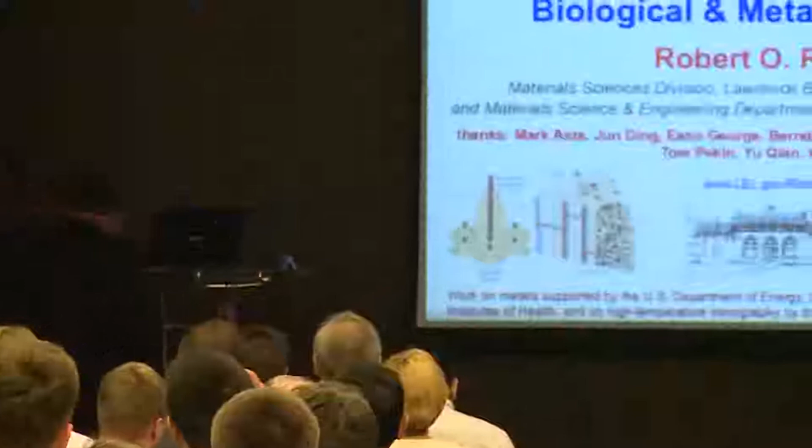Well, thank you, Leslie, and thank you, Professor Sagnet, for inviting me here. It's an awful long way from California, but it's been worth it.

I'd like to talk this morning about my favorite topic, which is damage tolerance, and I'd like to look at a number of different classes of materials where we've tried to enhance damage tolerance, which is basically fracture resistance coupled with some degree of strength. So I want to look at some biological materials. I'm not going to talk too much about this because there's not much biological work in this conference, but I would like to mention a few materials first, and then I'm going to talk about some metallic materials and some of the more modern metallic materials, to coin a phrase, these multi-element metals.

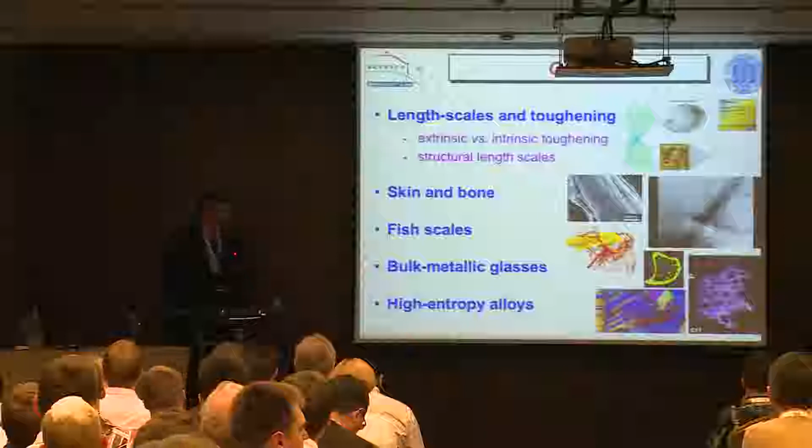So this is my outline. I want to say a few comments first of all about toughening and what I understand by fracture resistance in materials, and then take you through something which is probably quite close to you, which is your skin and your bone. I'll have a little short detour via fish scales, and then I'd like to talk about these new, not so new perhaps anymore, multi-component alloys, mainly bulk metallic glasses and high entropy alloys.

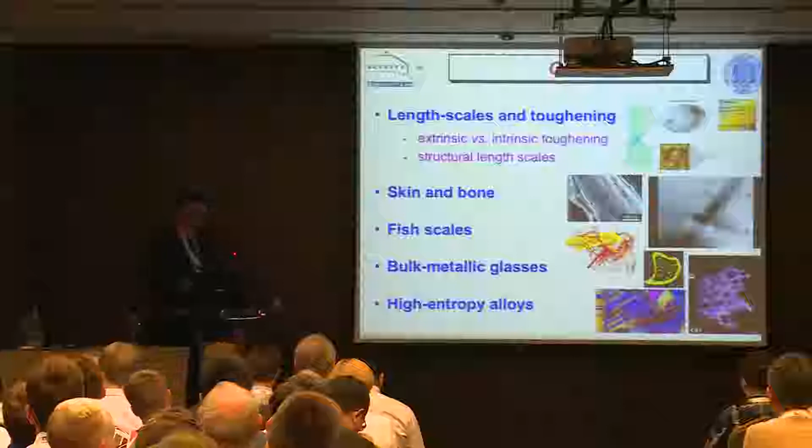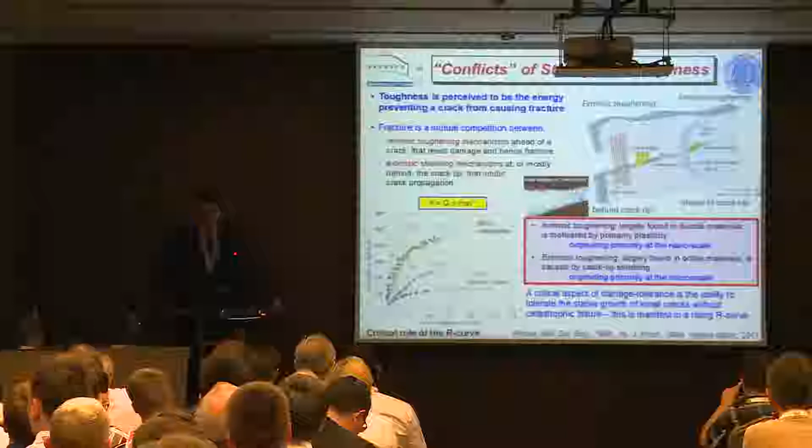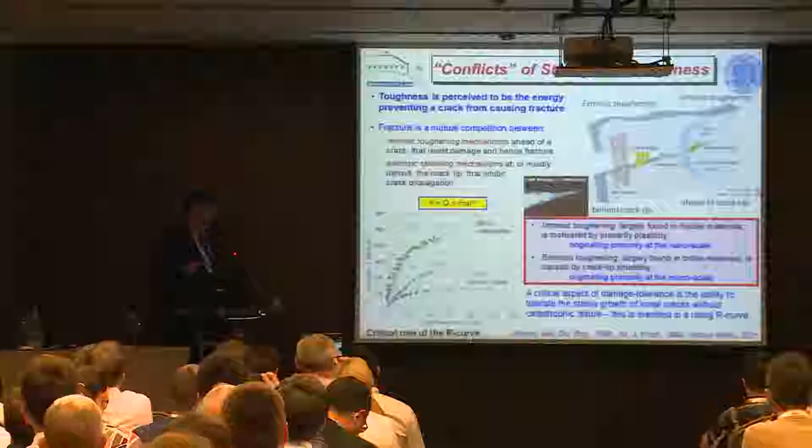So first of all, what is damage tolerance, and what do we understand by this? It's, as I said, a combination of fracture resistance, toughness, and strength, which is generally a compromise or a conflict, as I've called it. There's a conflict between strength and toughness. Most strong materials don't necessarily excel in toughness, and vice versa. And there's a number of conflicts in this whole aspect of fracture.

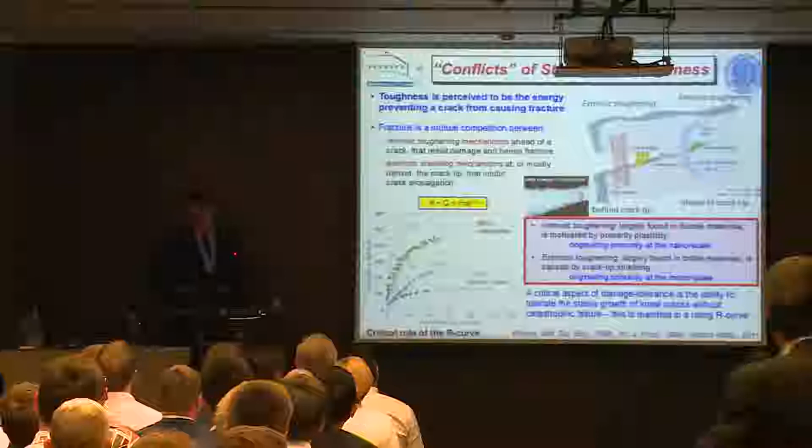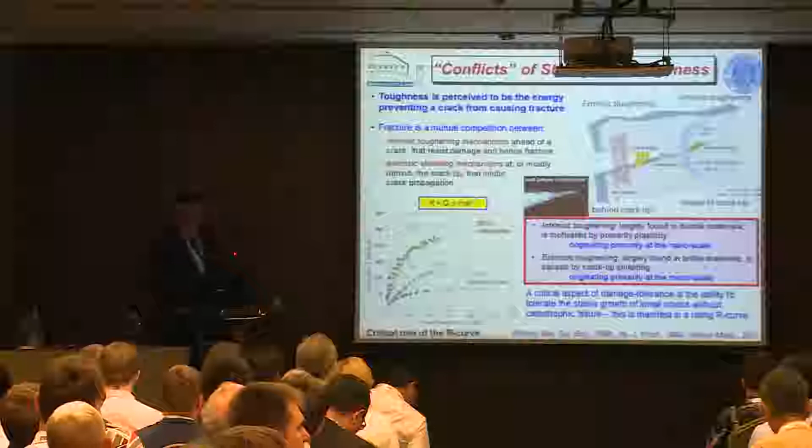I like to think of fracture as a mutual competition between classes of mechanisms. There's what I call intrinsic mechanisms ahead of the crack tip, toughening mechanisms, and these are mechanisms that basically inhibit damage, whatever that may be - void growth, particle fracture, and so forth. The prime factor here is basically plasticity. There are other things, but that's the prime thing. These mechanisms take place ahead of the crack tip, and they really are how metals or ductile materials are toughened. But those mechanisms simply don't work when you get into a brittle material like a ceramic.

And then there's another class of mechanisms that operate behind the crack tip or at the crack tip. I call these extrinsic mechanisms, and these are not associated with plasticity necessarily. They're associated with shielding, and they effectively lower the local stress or strain field at the crack tip compared to what you think you have. There's a number of mechanisms - bridging is one, of course, as we see in fiber composites and lots of different materials. Crack closure, which is a wedging mechanism, is seen in fatigue, and deflection.

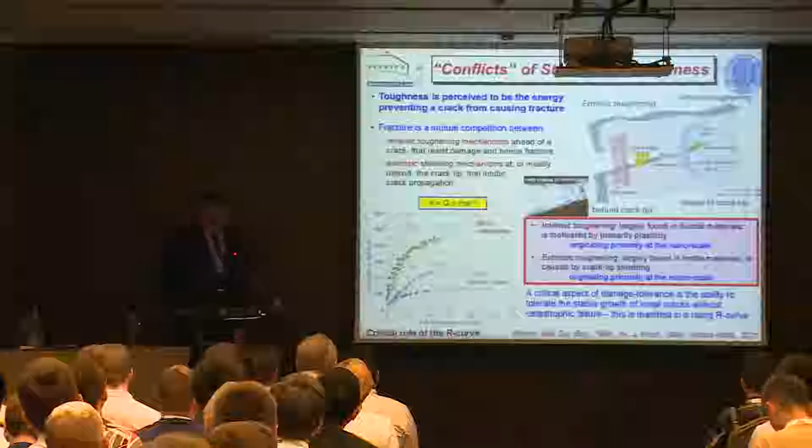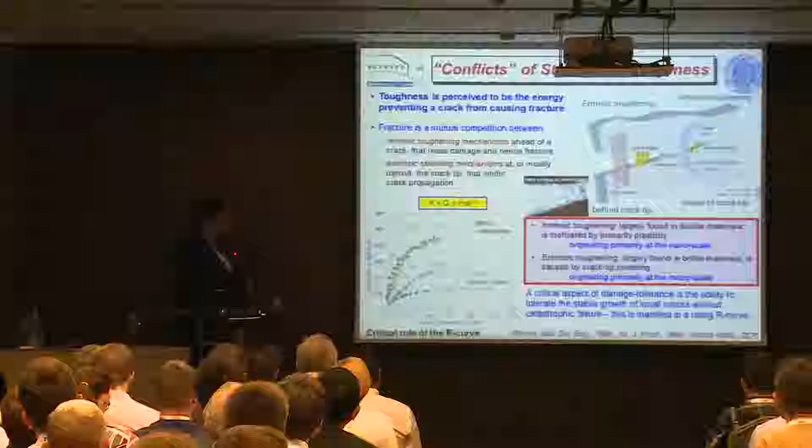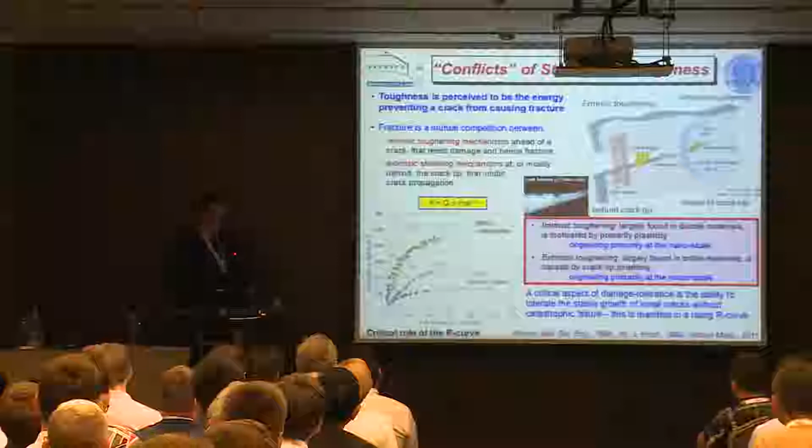Now there's an interesting contrast here. These plasticity or intrinsic mechanisms originate typically around the nanoscale, but these other mechanisms can operate at any scale. In fact, in bone, we'll see that these mechanisms operate on the scale of hundreds of microns. These are a property of the material, and these depend on the geometry of the crack and so forth. These mechanisms have simply no meaning for initiation - you have to have a crack to have an extrinsic toughening mechanism, so these only operate for crack growth.

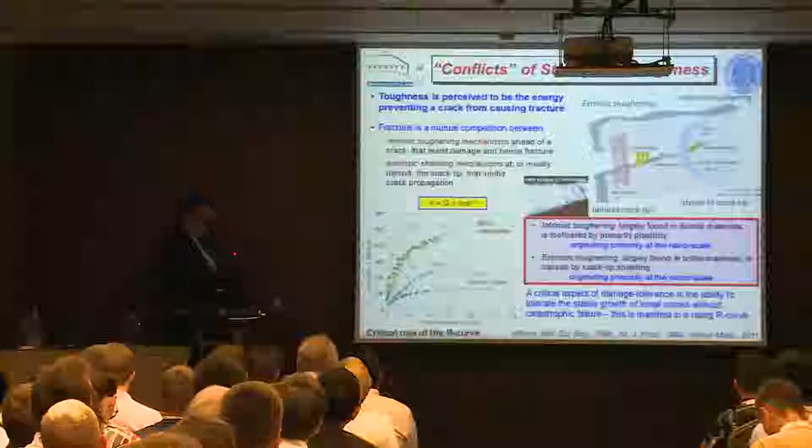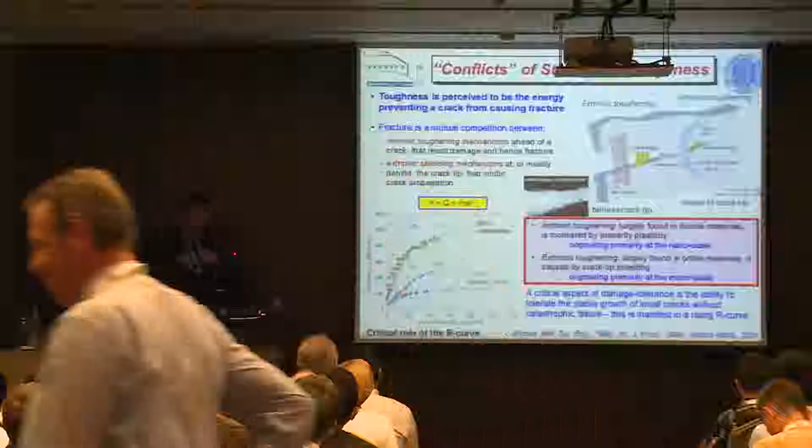And what's interesting about this is that these mechanisms generate the so-called R curve. We've heard about that the last few days. This is sort of a toughness parameter as a function of crack growth. And the R curve is absolutely fundamental, in my opinion, from the perspective of damage tolerance. You don't want things to simply break catastrophically. You want them to be able to tolerate damage, and damage means slow crack growth in many cases. So the generation of an R curve is extremely important.

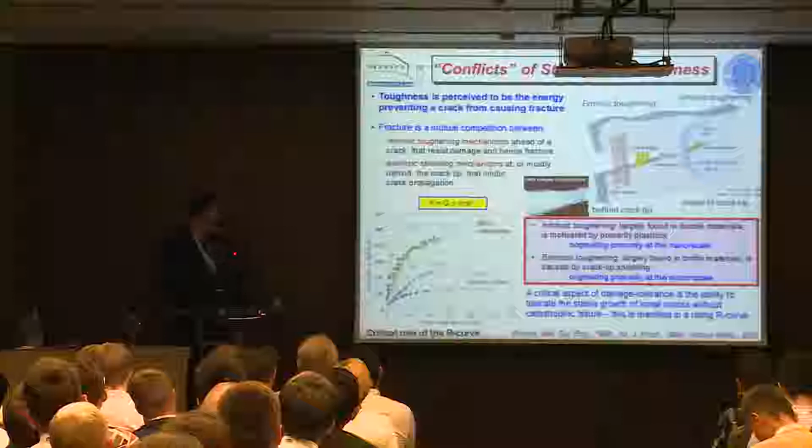Now, as I said, there's a conflict in many materials. Toughness and ductility don't always go with strength. These are mechanisms that predominate in brittle materials like ceramics, these in metals. Yet biological materials do a very good job, a much better job than we do in balancing these properties, and in many of those materials you'll see both these classes of mechanisms operating at the same time.

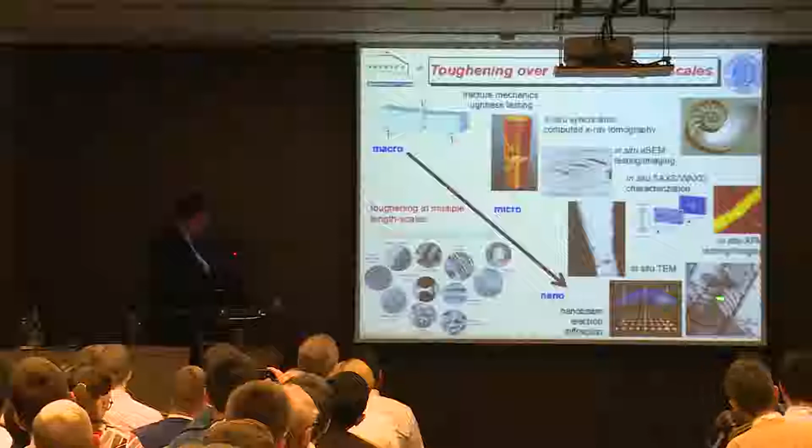So, biological materials first. These are characterized by multiple length scales. You've all heard of hierarchical structures, and there is structure from the atomistic all the way up to the macro scale. We use a number of techniques: at the macro scale, fracture mechanics and a lot of in situ testing in the SEM, plus in situ tomography at the micron scale. We'll talk a little about small angle X-ray scattering, which is a bit lower than that, and at the nanoscale we now do quite a lot of work in various TEM and STEM techniques to try and look at mechanisms. So that's our scale of techniques over these length scales.

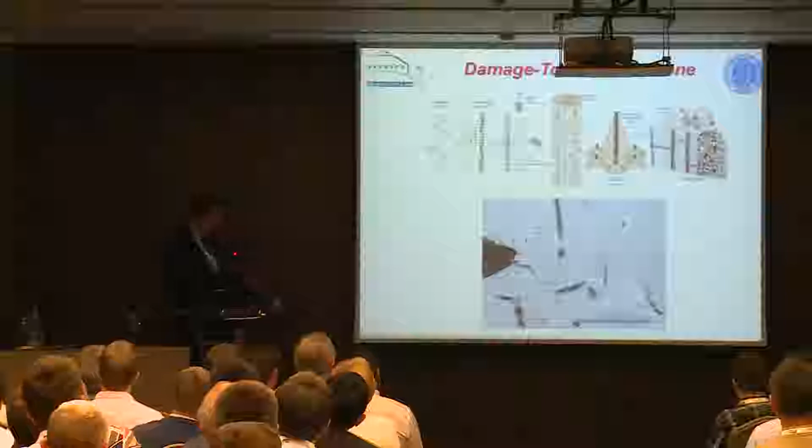So to start with, let's talk about bone. Bone is a pretty complicated but remarkable material, and it has a lot of length scales. A simpler way of looking at this is what Danny Wagner and Weiner did a few years ago, the so-called 7 hierarchies of bone. Down here we're talking about collagen molecules twisted together to form collagen fibrils. This takes us into the submicron, down to the nanometer stage.

These fibrils have minerals deposited on them, apatite, at fairly regular intervals, about 67 nanometers apart. The fibrils are then twisted into fibers, and we're now up into what's sometimes called the lamellar bone regime, in the tens of microns. Then we go up into the hundreds of microns, where we have so-called osteons, which contain the Haversian canals. These are concentric structures; the interior carries the blood vessels, and the bone remodels that way. This has characteristic length scales of hundreds of microns.

And then at the top we have the bone itself, with the compact or cortical bone on the outside, and the trabecular or spongy bone on the inside. So it's a whole range of length scales.

Now how is bone toughened? Bone's a pretty resilient material, and this extrinsic-intrinsic notion works reasonably well. If you look at mechanisms below about a micron, ahead of the crack tip, it's plasticity. Plasticity in bone involves a variety of mechanisms, but the principal one is that collagen stretches and then tends to slide apart - something called fibrillar sliding, which is just the sliding of collagen molecules next to each other. That's a plasticity mechanism, but if anything locks that up, that's how you lose ductility in bone. So the toughening mechanisms at these scales are plasticity, predominantly this fibrillar sliding.

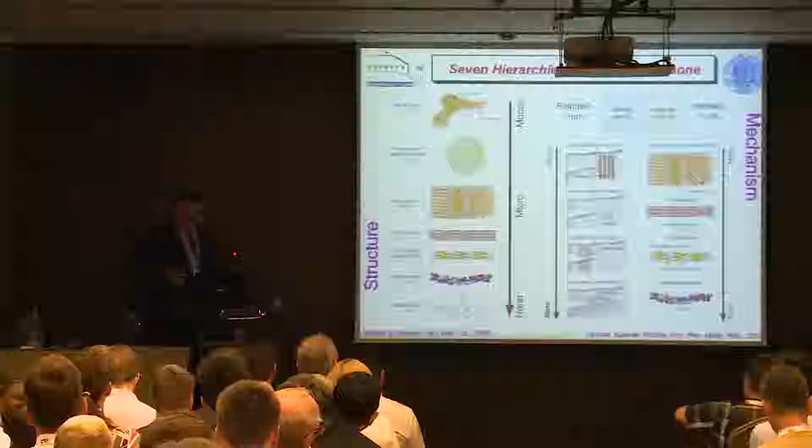But if you move up in scale to above a micron, and look behind the crack tip, you see mechanisms you'd see quite readily in a ceramic. There's a lot of microcracking in bone. It's very important - it leads to remodeling of bone. It's also an inelastic mechanism, a sort of pseudoplasticity. Cracks grow into this sea of microcracks, and little regions in between those microcracks become bridges, leading to very strong deflection. These columns here are the so-called osteons, which run along the axis of the bone.

These are Haversian canals inside. The boundaries of these osteons, where bone remodels, tend to have a higher mineral content, and cracks will tend to deflect along those boundaries.

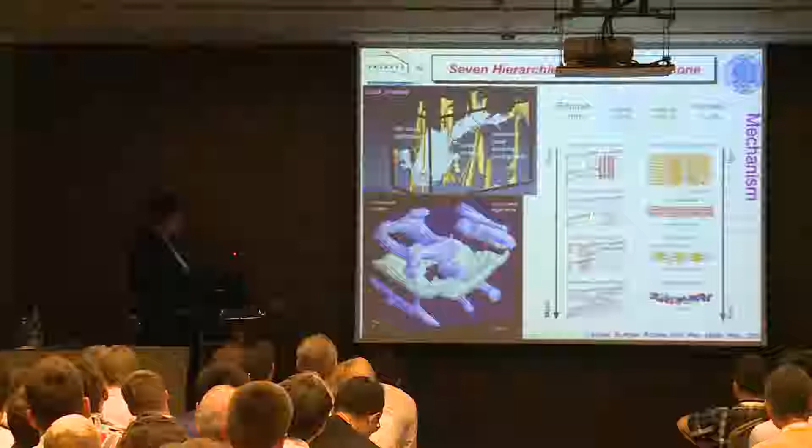So if we look at a typical example, this is tomography - I can show some examples of these mechanisms. This is a three-dimensional tomography of bone. This light blue is, of course, the Haversian canals. This white area is the crack, and this is the front of the crack here. These dark blue areas behind the crack tip are regions of uncracked ligament bridges.

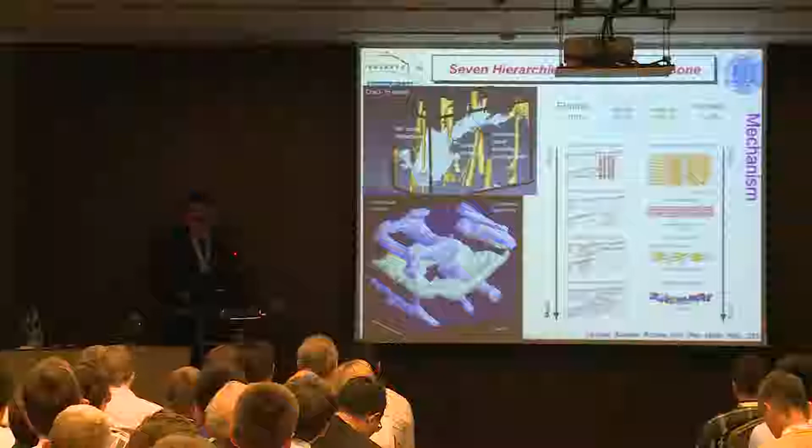And the deflection is very clearly shown here - these yellow columns are the osteons. This piece of bone is being pulled vertically, so the crack should propagate perpendicular to the maximum tensile stress. But you can see in the white area that the crack deflects dramatically as it encounters these osteons, and the deflection is actually more than in-plane.

You get twist as well. So there's a lot of toughening associated with these extrinsic mechanisms, in addition to the classical plasticity mechanisms at the smaller scales. Now, how does this affect bone's properties?

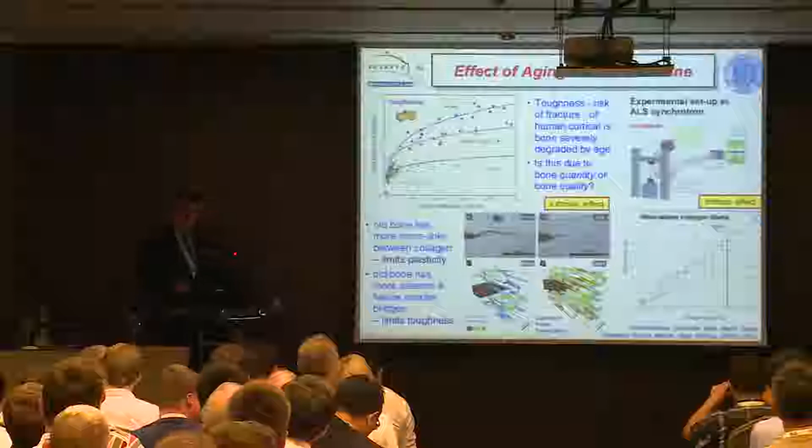Now, I've got many examples. This is an old one, you may have seen this before, but it's an easy one to look at. I've looked at various diseases. We don't always understand the biological source of those diseases, but we can see why it affects bone. This is one that's close to my heart.

When you start to age, you have a higher propensity of fracture of bone. A lot of that's thought to be due to loss of bone mass, which is a bone quantity issue, and it of course is, but there's also a bone quality issue as well, which is the fact that the bone deteriorates in its toughness. These are R curves.

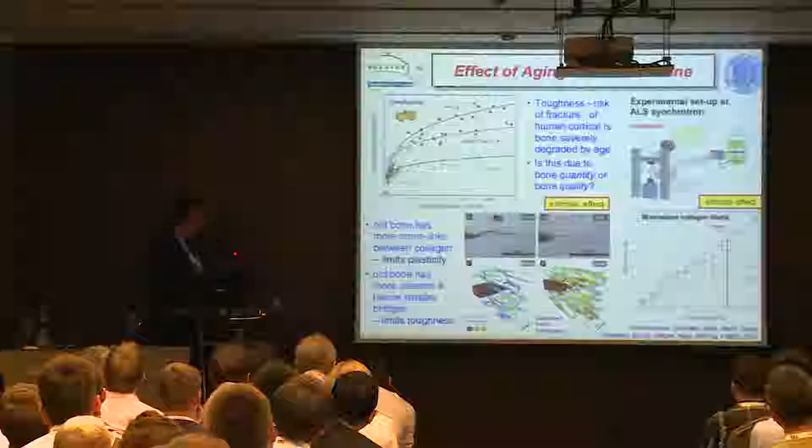This is young bone, a 30-year-old, a 50-year-old, and 80 to 90-year-old bone. As you get older, you don't see this very clearly, but there's a deterioration in the initiation toughness of bone here, and there's a much greater deterioration in the crack growth toughness. So why is that? Well, just quickly, you can again subdivide this into intrinsic and extrinsic mechanisms.

Extrinsically, you see these little uncracked ligaments, these little uncracked regions that act as bridges. Their spacing is typically the spacing between the osteons, because that's where the microcracks will form in those mineralized boundaries.

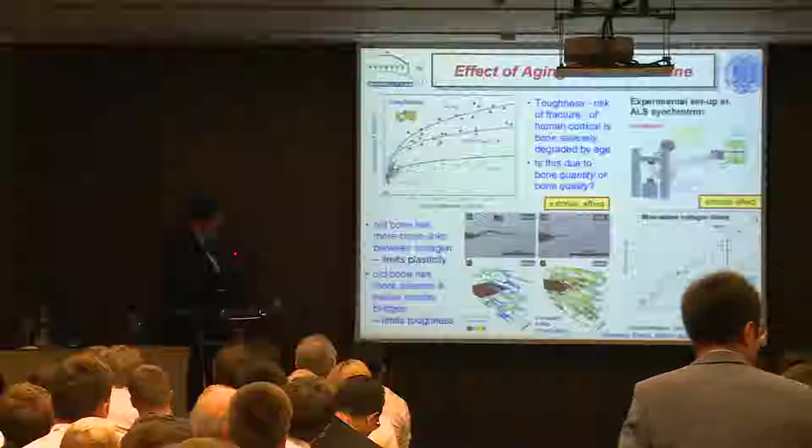If you look at a piece of young bone versus a piece of old bone using tomography, these blue and green columns are the osteons, and you can see there's a dramatic increase in the density of osteons as you get older, particularly with excessive remodeling. Since these little bridges are a function of the spacing of the osteons, this bridging effect becomes much less effective as you age, so there's a deterioration in the crack growth toughness.

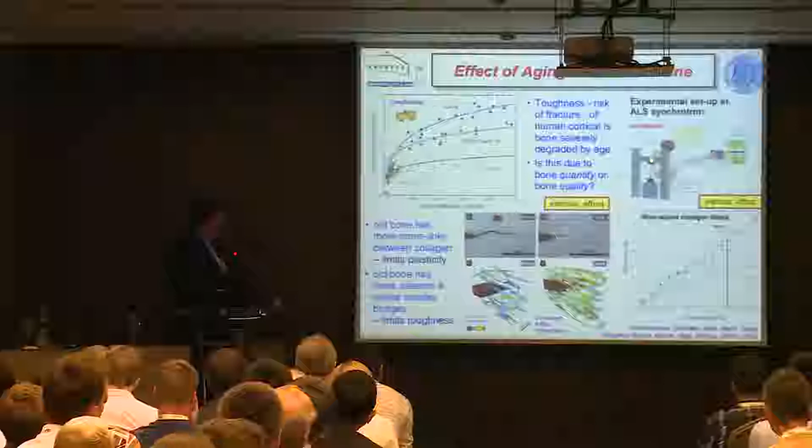The intrinsic part is interesting too. We can look at this using the synchrotron. We do a tensile test on a piece of bone and measure the strain in the bone. Then we do wide-angle X-ray diffraction, focused on the mineral, to get the strain in the mineral—that's not too important here.

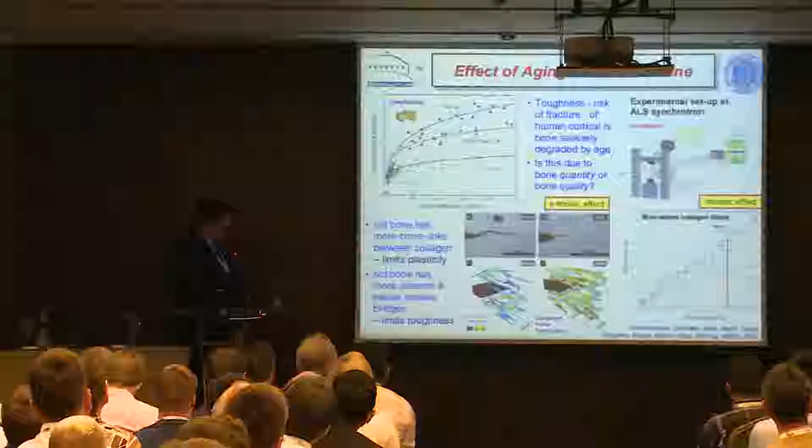We can also do small-angle X-ray scattering and look at the collagen. Since the mineral is very uniformly placed along the collagen, we can get a strain there as well—we can measure the strain in the collagen. What you find is if you look at the strain in the collagen versus the strain in the bone itself...

For young bone, at about 1% strain, virtually all the strain is carried by the collagen, of course, because that's the flexible part of bone. But for old bone, it's a very different story—for a 1% strain in the bone, only half that strain is carried by the collagen. So the collagen is less effective.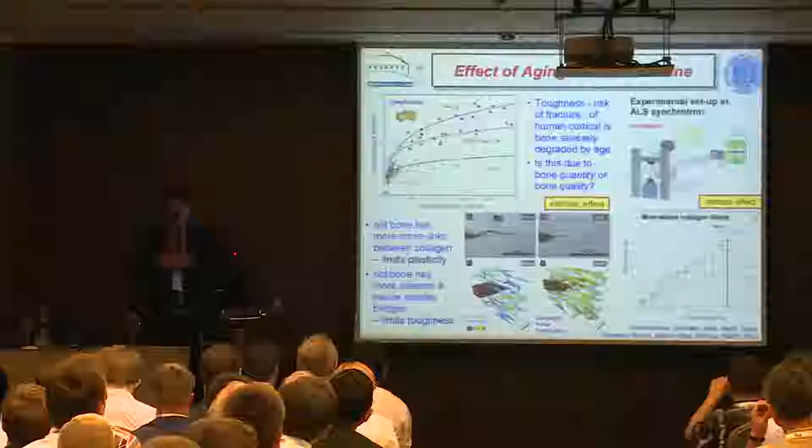What basically happens is, instead of sliding apart, it locks up, because of cross-linking. Your collagen has many types of cross-links in bone—these are called non-enzymatic cross-links, and they basically lock up the process. It's just like embrittlement in a metal; you just lose ductility. So those are two very different classes of mechanisms—they operate at very different scales, but they all affect the toughness.

This is an example from a problem with the use of bisphosphonates. These are widely prescribed to deal with osteoporosis, particularly in women, and they work by limiting bone resorption. But a small portion of the population suffers what are called atypical femoral fractures—sudden breaks of their femurs. Relatively young people get this if they've taken these drugs, and it only accounts for about 0.2% of the population who take these drugs, but it's such a critical fracture that the use of bisphosphonates has dropped dramatically in the last 10 years because of fears of this. This is unfortunate, because these are good drugs.

So we've been trying to understand what causes this. You'll notice this fracture is very, very clean. If you broke your arm now, you'd have a really jagged fracture as the crack tends to deflect along the osteonal boundaries. This one is very clean, and we've recently been able to get bone from people who've suffered these fractures, and you can see what happens here.

In regular bone, you get deflection. You see a crack growing this way, the osteons are this way, and the crack tends to deflect. This is very common in healthy bone, but in people prone to fracture problems, the cracks simply don't deflect. So there's something associated with abnormal mineralization.

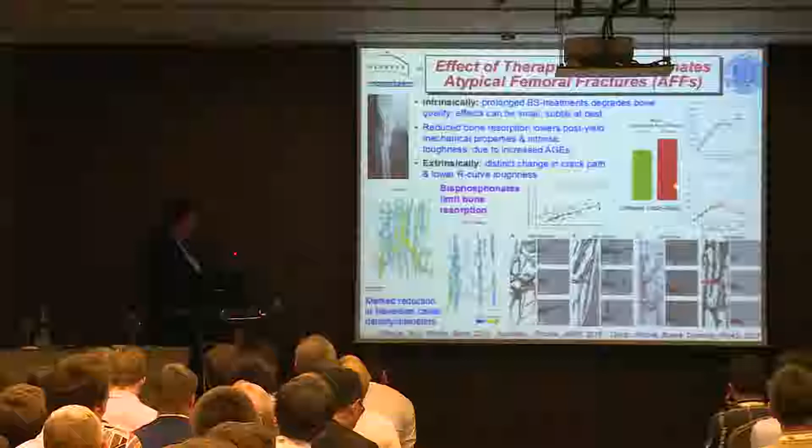We also see excessive cross-linking. This is the cross-linking in bisphosphonate-treated bone, compared to regular bone. So there's also a loss of ductility. You can see there are these two contributions to the problems of toughness, and this is not unusual.

We've looked at things like osteogenesis imperfecta, which is brittle bone disease in children, and we've also looked at vitamin D deficiency. These notions of a lockup of collagen plasticity and a change in the crack's deflection path are quite common in showing how these diseases cause bone fracture. Now, the biological part behind that is much more complicated and not very clear, but these simple fracture mechanisms seem to apply very well in bone.

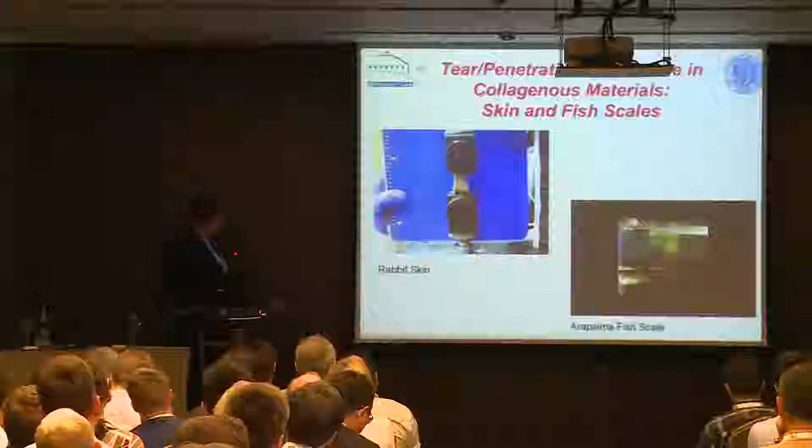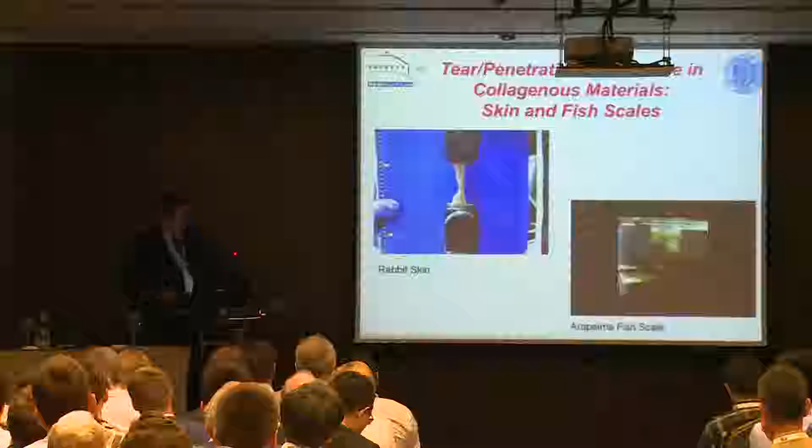Now, looking at something different, this is skin. If you're a fracture person, skin—and there's a bit of fish scale here too—skin is not a very good material because it's almost impossible to break. You just keep pulling it and pulling it and pulling it. This is a piece of rabbit skin, and it's very difficult to break.

In fact, there is a hang glider in America who jumps off high mountains, and he has his wings attached to his skin—not a harness, but attached to his skin. So skin is a pretty complicated material, but you can see from these pictures how it's almost impossible to break, whether you have an internal or an edge crack—it just doesn't break.

So why is that? If you look into the many layers in skin, the dermis layer consists of collagen fibrils. They don't have mineral, they're generally just pure collagen, but they're long, twisted, and curved. When you pull skin, we put this in the synchrotron and watch the movement of the collagen under load, you get a series of processes.

The collagen is sort of a mess to begin with, all tangled. As you start to pull it, it will first rotate, then start to straighten, uncoiling. It'll then stretch apart, and finally, if you pull long enough, it'll break. We can watch this in real time.

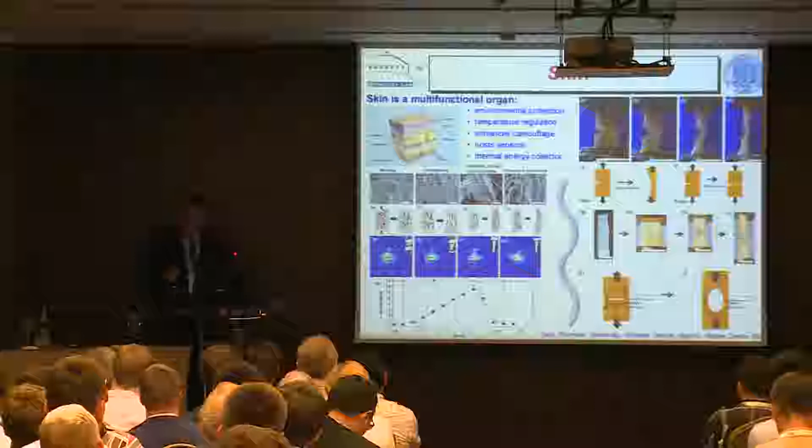To make a long story short, these are images showing the collagen in skin. It looks like this to begin with, and when it's fully broken, it's fully aligned like this. So these are very effective mechanisms for absorbing energy and increasing tear resistance.

Now it's funny, these fish scales are kind of similar—we've also looked at fish scales. These are not pure collagen, they have mineral in them, but a classic armor will have a very hard surface which resists penetration. If the whole material was made of that, it would just shatter. So there's generally a softer but tougher sublayer or inner layer, which accommodates the extra deformation.

In biological materials, this is just changing the mineral content—it's more mineralized on the surface than in the interior. Biological materials always do gradients very well, and they smooth out any sharp interfaces. So there's a beautiful gradient in mineralization as you go from the hard surface to the subsurface.

This is the arapaima fish, an enormous fish in the Amazon, and its predator is the piranha. I work with a guy called Marc Meyers in San Diego, who goes fishing and swimming in Brazil, catches piranhas, and brings the teeth back. We use those as the penetrators of the skin. This is a picture of what happens when you put a piranha tooth into the skin.

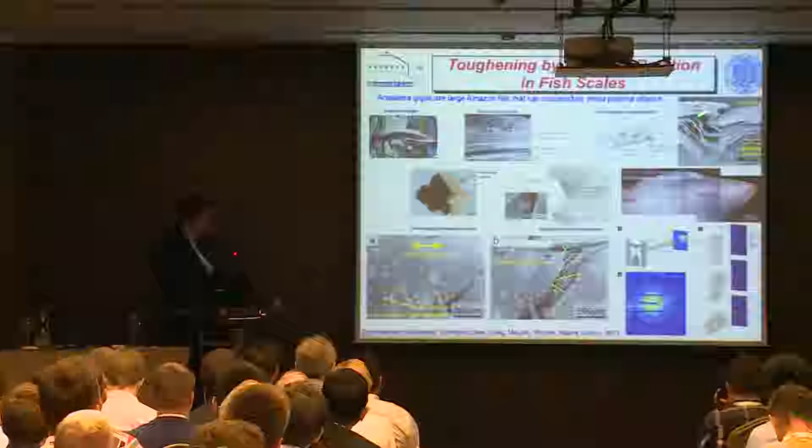What's interesting is that it breaks the surface sometimes, but the inner layer is extremely tough. How does that work? Again, we put this in the synchrotron, and what we find is that the collagen will simply rotate to carry more of the load. It's a beautiful mechanism, and we can watch this in real time.

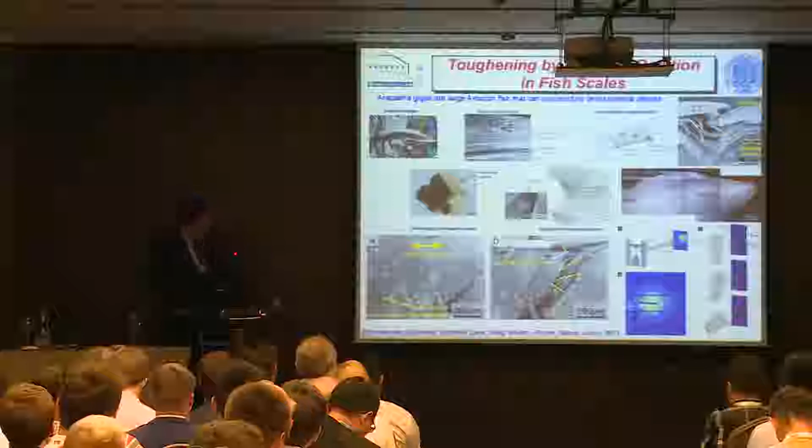These structures tend to be what's called Bouligand structures—like a spiral staircase—and they will simply rotate. The ones closer to the tensile axis will carry more of the load. And there's some fish that have double Bouligand structures, which are even more complicated. Very, very interesting.

Anyway, that's the way that collagenous materials and mineralized collagenous materials tend to develop their damage tolerance.

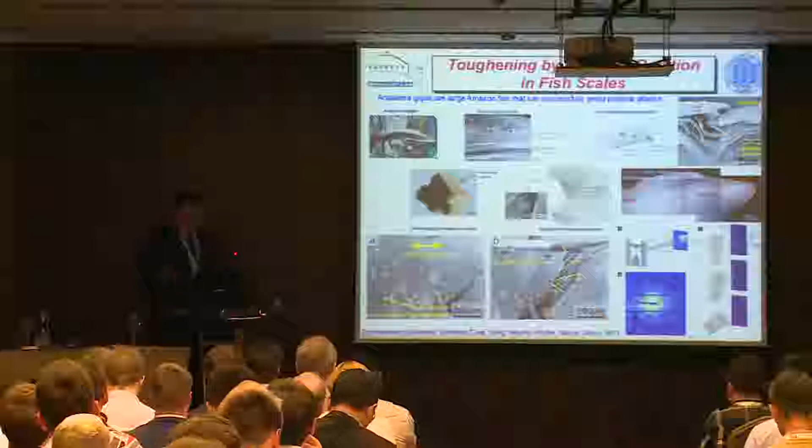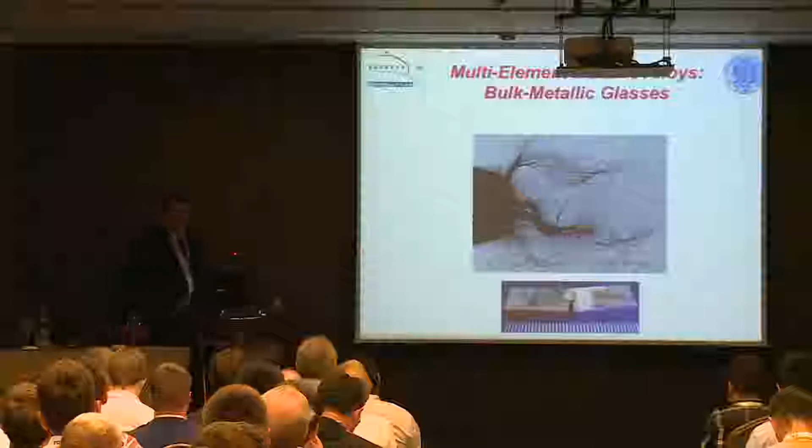Now let's look at something very different: metallic materials. The ones I'm interested in are some of the, dare I say, newer ones. These are multi-element materials, and the one that's been around the most is so-called bulk metallic glasses.

These tend to have many elements in them, and the notion they form a glass is because of the so-called confusion principle. Each element has a different crystal structure, perhaps, and when they're all together, they get confused, and the kinetics are slow, so you can make a glass.

This is one of these materials, and we think of glasses as being fairly brittle, but these are anything but brittle. Glasses have a problem, these metallic glasses have a problem, in that they form shear bands. In many glasses, you form a single shear band, it zips across the material, the thing fails at near zero strain, and the toughness is down to 1 or 2 megapascal root meters. So that is obviously not a good thing.

But it turns out that if you can distribute and have multiple shear bands, this is the basis of plasticity in these materials. A single shear band will kill you, but multiple shear bands give you plasticity. Metallic glasses tend to have very high strengths, almost near theoretical strength in some cases. So if you can get plasticity, which generates ductility - not much, but enough - you can generate toughness. So the key to getting a damage-tolerant metallic glass: you've already got the strength, you want to get plasticity, and in simple terms, that's promoting multiple shear band formation.

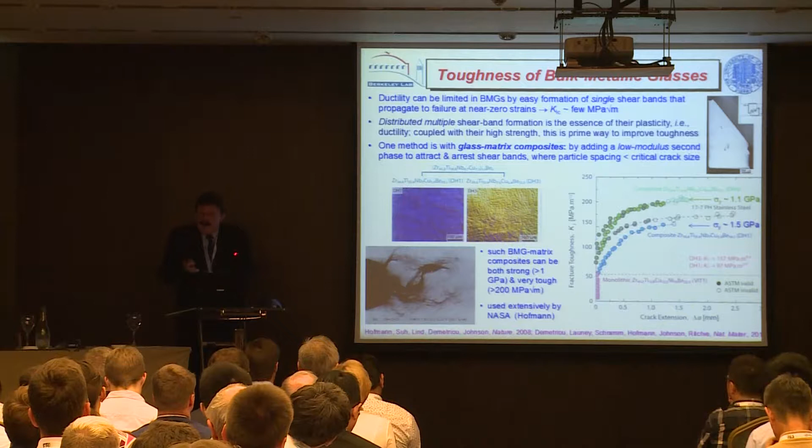We did the toughness measurements for him, and we got very good properties. The typical glass, this is Vitreloy, the first ones that came out, has a toughness of 50 and then it breaks catastrophically. A lot of golf clubs were made of that, and a lot of golf clubs fractured catastrophically. But these glassy composites show very strong R-curve behavior. This image shows one of these glass composites, and we're getting toughnesses of around 200 at best, with strengths over a gigapascal. These are very respectable properties.

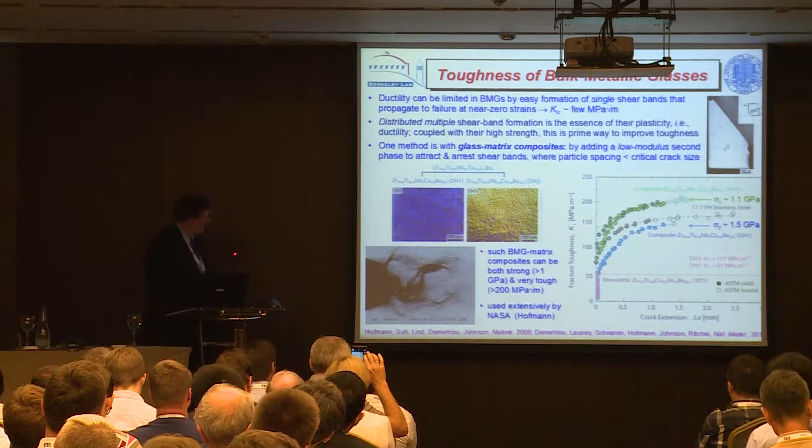There's a couple of things you need to do. You have to have the second phase spaced small enough that you can't see that size of crack in the monolithic glass. You have to have the shear bands intersecting that second phase, so you need a low modulus phase, because of course cracks will tend to follow a low modulus phase. And then you want the shear bands to arrest and not penetrate the second phase.

If you look at the He-Hutchinson plot of a crack penetrating or arresting at a dissimilar material interface, it's a function of the elastic mismatch across the interface, which is simply the difference divided by the sum of the respective moduli of the two materials. This is the first Dundurs parameter. On this axis, it's basically the interface toughness divided by the toughness the crack is going into.

You want to be in this region for the crack not to penetrate - you want it to arrest or go around the particle. To get into this region, you want the Dundurs parameter to be close to 1, so you want the stiffness of the second phase to be as low as possible. This made very good materials, and in fact they're being used by NASA a lot now. The person who did a lot of this work was Doug Hofmann, who of course works with NASA.

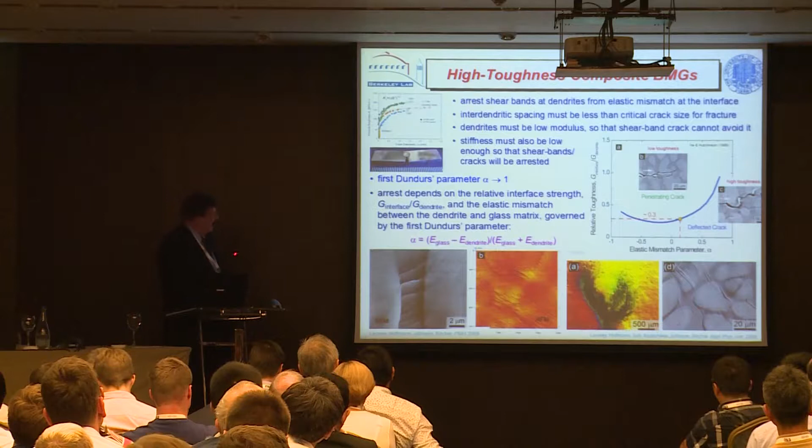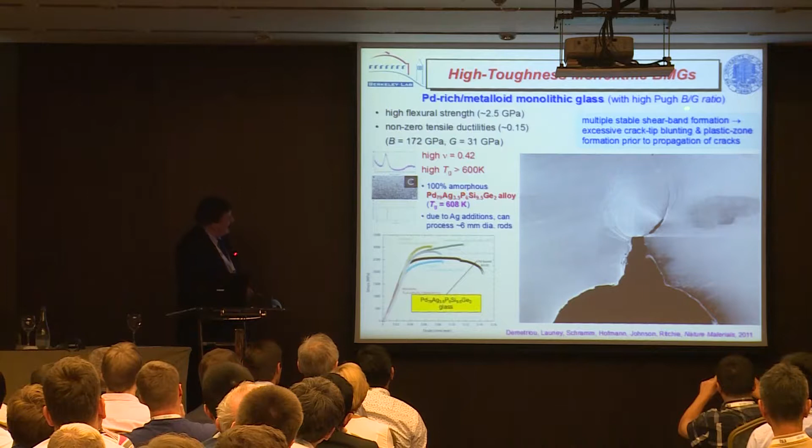We wondered if we could do this in a monolithic material too, and this is one of the toughest monolithic glasses. We went back to a very old, sort of hand-wavy notion, the Pugh ratio: if you had a high bulk to shear modulus ratio, low shear modulus would give you lots of shear bands, but a high bulk modulus would prevent them from opening up to form cracks. Basically, we want a high Poisson's ratio.

We made one with a palladium-containing glass. It's obviously not very practical because palladium is about $1,000 an ounce. But we made this material, and it was remarkable. You can see from the image, you get tremendous ductility.

We got a bending strength here of 2.5 gigapascals, and we did toughness tests on this, and we got R curves with toughnesses up to 200 megapascal root meters. These are enormous numbers, an enormous damage tolerance. If you look on an Ashby plot of toughness versus yield strength, we're right along the limit of the best there is, among these metallic glasses, composites, and this particular palladium glass.

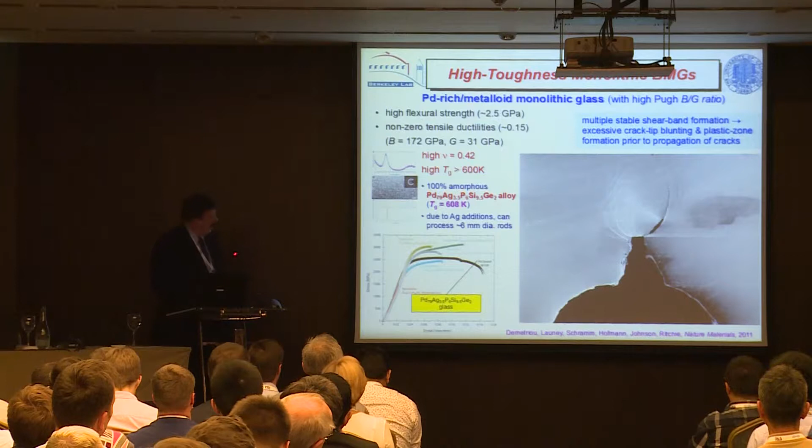We got the front cover of Nature Materials for this. It was very interesting, the paper was called 'A Tough Glass,' and we got lots of people calling up. My favorite phone call came from Ferrari, who said, 'We saw your paper on tough glass, we think this would make a wonderful material for a windshield.' And I said, yeah, it's got all the properties you want, there's just one small problem—of course, it's not transparent.

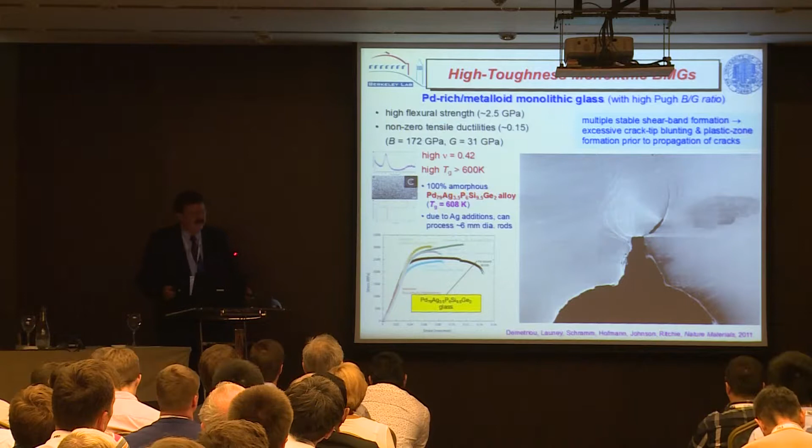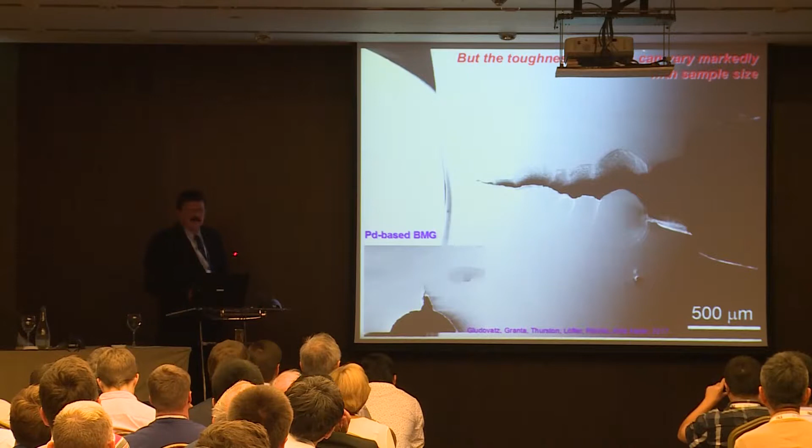So everything was good, we thought we'd conquered the world. Then we started to get more of this palladium glass, some from Germany. We'd measured this very, very high toughness of 200 MPa root meters, and then we started to measure somewhat larger samples, and the toughnesses were a little different—we got down to 20 MPa root meters. So this is variability in the toughness, but it's huge variability, varying from 20 to 200 in the same material with only a small change in the size of the sample.

So we've been interested in this. There's a lot of variability in the toughness measurements of metallic glasses, mainly because they've been badly measured. A lot of people do notch effects—they measure the notch apparent toughness, and the notch root radius versus the apparent toughness is a very strong effect, much stronger than in regular materials. These are sort of fictitious numbers, so it elevates the toughness erroneously, and people like that.

But if you measure it properly—and we tried to measure it properly—this is looking at a quite common glass, Vitreloy 1 again. This is the toughness as a function of the ligament size, basically the size of the sample. This pertains to small-scale yielding, whether you have a K field or not. If you're measuring in a linear elastic regime, in the relatively less tough glasses, everything's fine—the toughness doesn't vary with the size of the sample, as you might expect in a crystalline material. But as soon as you get out of that regime into the so-called non-linear elastic fracture mechanics regime, where J should apply, instead of getting a constant number in terms of J, you just get this massive scatter in the data—almost an order of magnitude variation in toughness.

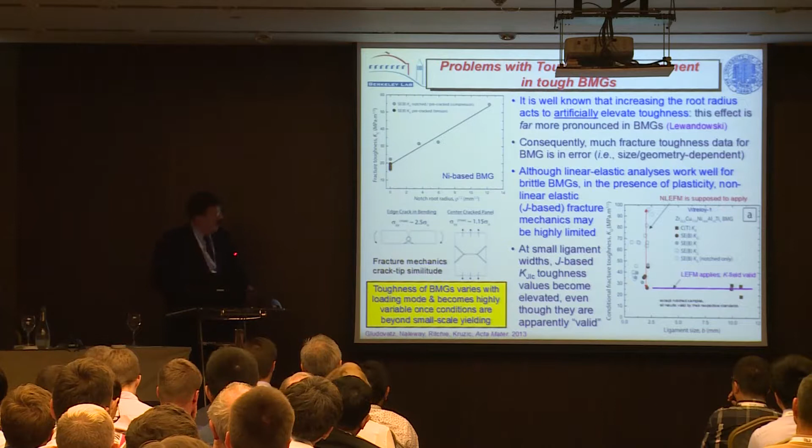Now, why is this? This to me is very similar to the old story when J was first developed. We have John Landes here—he did this work. They were interested in two very extreme geometries, the so-called center tension versus the edge crack bending. These fields are unique under linear elasticity, but if you're in slipline fields for non-hardening plasticity, they're completely non-unique. The reason J works as a means of measuring beyond the linear elastic regime is that locally at the crack tip you get this so-called HRR field, a power hardening field, which gives you some uniqueness.

The problem with metallic glasses is they don't have local hardening. In that little zone ahead of the crack tip, you don't have enough power hardening, so there probably isn't much of an HRR field there, and the old notion of slipline fields is a pretty accurate way of looking at this.

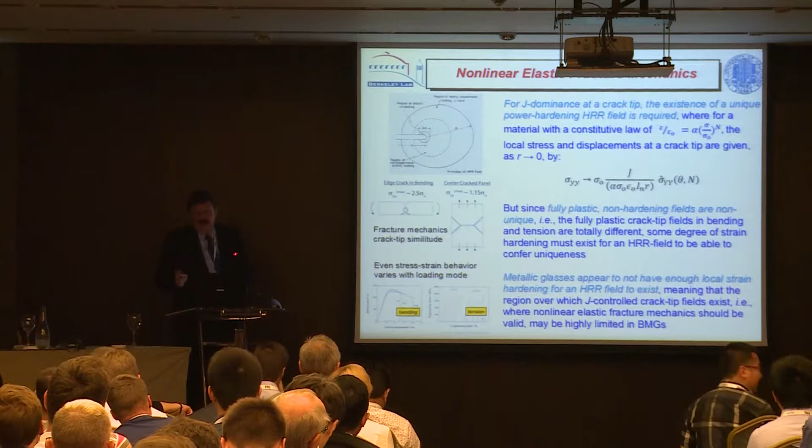Even tensile tests in these glasses are very different - this one's for bending, this one's for tension, they're very different. So we think it's going to be very difficult to get reproducible numbers in metallic glasses once you get to tough glasses, because the range at which the J approach to non-linear elastic fracture mechanics applies is very small, perhaps even non-existent.

There's a more interesting reason, which I think is more fun, and that is that I think the community now realizes that the amorphous state, the glassy state, is not a single state. There is some degree of local order in that amorphous state. People like Lindsay Greer talk about nanostructure in the amorphous glassy state. We tend to talk about local configurations or motifs of atoms that form in local order - this is basically local, short to medium range order.

Most of the most stable forms of these kinds of motifs have icosahedral symmetry. They have five-fold symmetry, and they're generally most stable. But there are some configurations that are not as tightly packed, that don't have as much icosahedral symmetry, and these tend to be relatively unstable. Evan Ma has coined the term geometrically unfavorable motifs, or gums. These are local order which is not quite as stable.

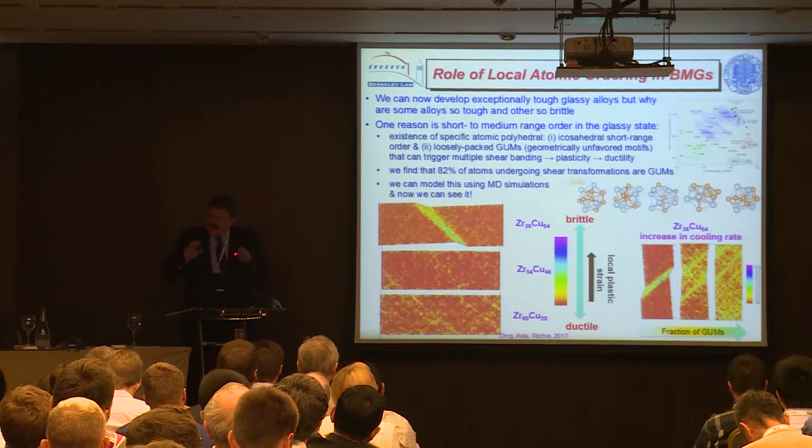This is all done by MD and DFT calculations. If you do these calculations, we find that 82% of the atoms involved in shear transformations - that's the shear bands which cause the plasticity, which is the essence of toughness in these glasses - are associated with gums. So I liken this to discovering the equivalent of grain size in an amorphous material. If you can build in a homogeneous or a wide distribution of these gums or less stable local symmetry, you can generate not a single shear band, which gives you very low ductility, but multiple shear bands that give you plenty of ductility and toughness.

And these things can be changed by composition. You can change them by increasing the cooling rate. The higher the cooling rate, the more likely you are to get this unstable local symmetry regions, which can trigger shear bands. So it's a very nice theory, but it's a theory.

How do you experimentally prove this? An MD calculation or DFT calculation is at some ridiculously low temperature and very high strain rate - it doesn't necessarily appeal directly to reality. So can we actually see this, can we prove this experimentally?

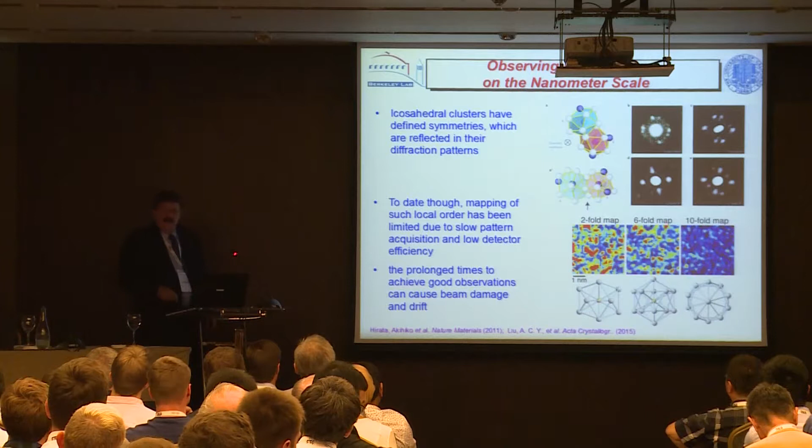So people have tried to do this. You can get diffraction patterns from these different local regions of symmetry, but if you try to map them across a large region - you're looking at a very small region with high resolution, but you want to map over a large region - there are problems. It takes too long, you tend to damage the foils, you can get drift. And so we've come up with a new technique.

This is being done at the National Center for Microscopy. I'm working with Andy Minor there, and we call this nanobeam scanning, nanobeam electron diffraction. Basically, we scan small regions - about a nanometer square region, a little column, about 50 atoms in each little column. That's sort of short to medium range order.

We take a diffraction pattern and we move on and start moving through the structure. We can do this extremely rapidly - we have extremely fast detectors on our TEMs now, which can look at 400 frames a second, and within the next year we'll be up to 100,000 frames a second. So we can look at these small regions, map out the order if it's there, and then move through large areas of material. We can also, at the same time, measure the local strain.

So we can get the icosahedral symmetry and the strains for each region at the same time. There's a chance here we might be able to put two and two together and show that these gums are the essence of plasticity and toughness of these glasses.

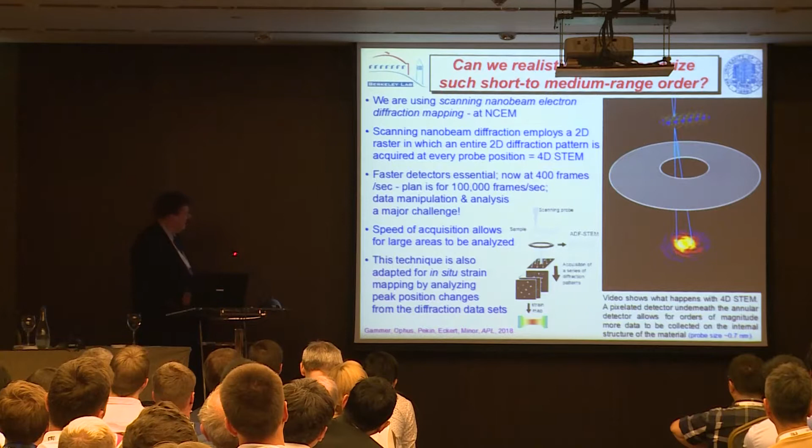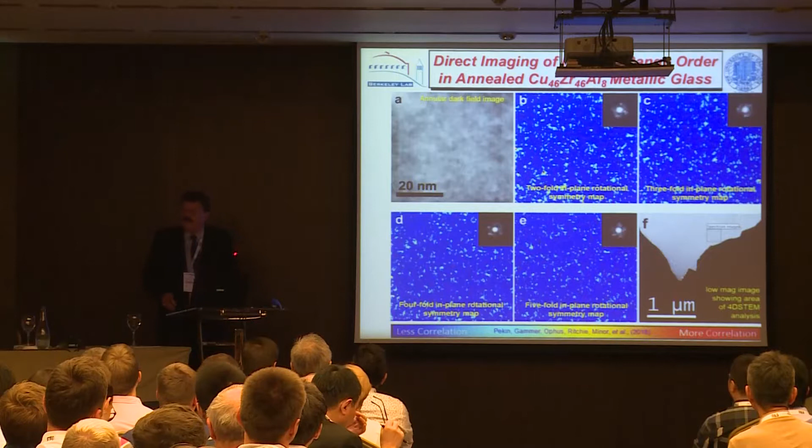This is the first set of data we've generated. It's still rather in its infancy, but what you're seeing here is a little piece of a simple glass, a small region here, and we've scanned across here. The colors here - the redder the color, you're seeing a local region of two-fold symmetry, three-fold symmetry, four or five-fold symmetry. So we can start to map out the local order with this technique. This is the first one we've done, and we've also tried to relate this to shear bands, and this is a process that's still being worked on.

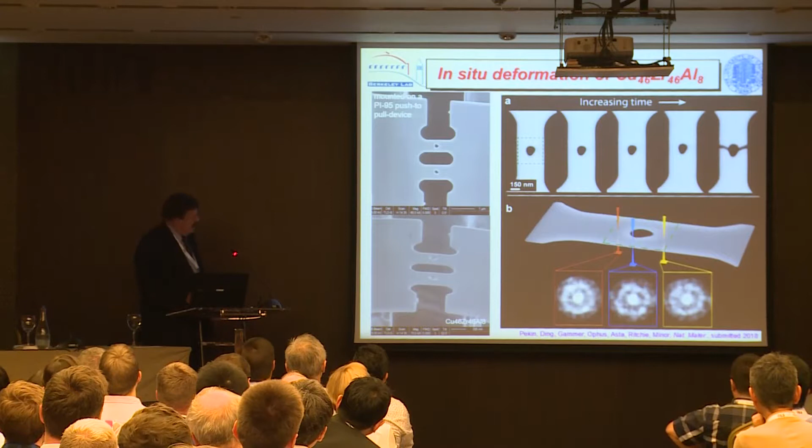We have a sample with a hole in it in the high-resolution electron microscope. It's pulled, and we are able now to map out both the strain and the local symmetry. This is the DFT, which is always very clean. You can see the strains generating out from this hole as being loaded this way. The darkened regions give you regions of lower icosahedral symmetry—those where the gums are, which we think are the essence of what forms shear bands. So that's what the DFT shows us.

So the tie-up here is that where we're having shear band formation can be associated with regions of less icosahedral, less stable local order. We're not there yet—this is kind of a chicken and egg argument—but we think we can put the two together and get experimental verification that this is the essence of building toughness in glasses by generating less stable local order.

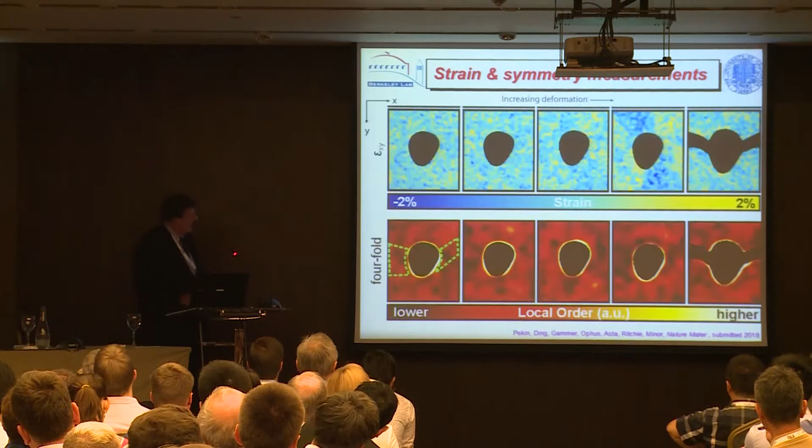So let me finish by talking about high entropy alloys.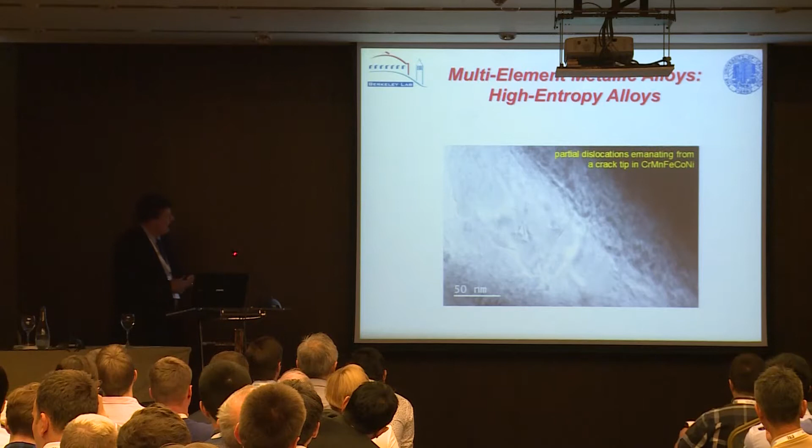These are probably the hottest thing in metals these days. As you probably know, high entropy alloys are alloys with multiple elements. Typically, when there's more than about 5 elements, the original concept was that configurational entropy would overwhelm the enthalpy of phase formation, and we'd end up with a single phase material.

Now, we don't think that's true anymore, but the alloy that's closest to this was done by Yeh initially in Taiwan, but my buddy Brian Cantor in England also was trying to do this. He didn't coin the term high entropy, but he came up with what is now known as the Cantor alloy—a chromium manganese iron cobalt nickel system. There's a variety of crystal structures, but it forms a single phase FCC material. This is probably the most popular high entropy alloy.

A lot of work was done in China and in various places for 10 years or so, but then Easo George at Oak Ridge got involved and started to make very good material. We got access to this material, and it's quite well known now that this Cantor alloy has pretty good properties at room temperature.

It has a strength of about 800 MPa and a ductility of the order of 50 or 60%. But what's remarkable is that everybody knows now that when you go down in temperature, from room temperature to liquid nitrogen, it gets 70% stronger. That's pretty obvious. But it also gets 25% more ductile.

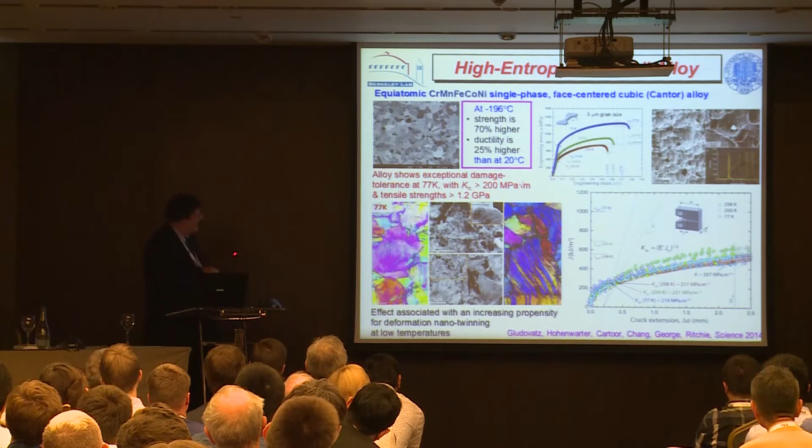So we looked at this because the room temperature properties are pretty good too, and there's no twinning there at room temperature in this alloy. We looked at TEM studies, done by a colleague of mine, Yu Qian, at Zhejiang University.

These particular alloys, as you probably all know, have fairly low stacking fault energy but high friction stress. If you do a fracture toughness test in the TEM, which is not really a fracture toughness test, you see lots of partial dislocations zipping out from the crack tip with their trailing partials and a bit of stacking fault in between. But you see a duality of deformation mechanisms.

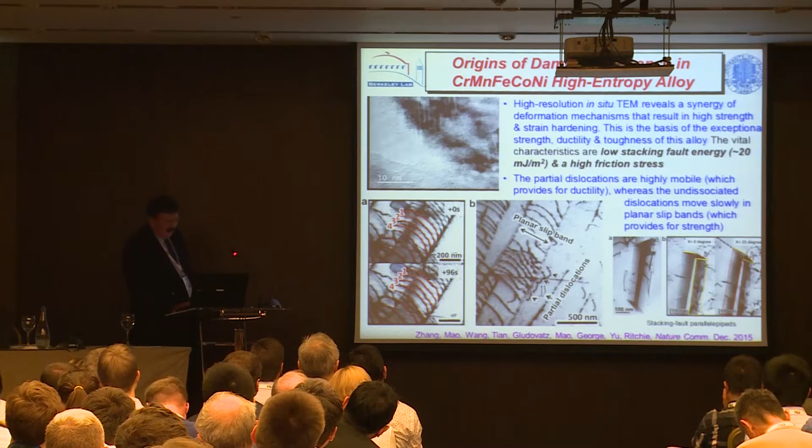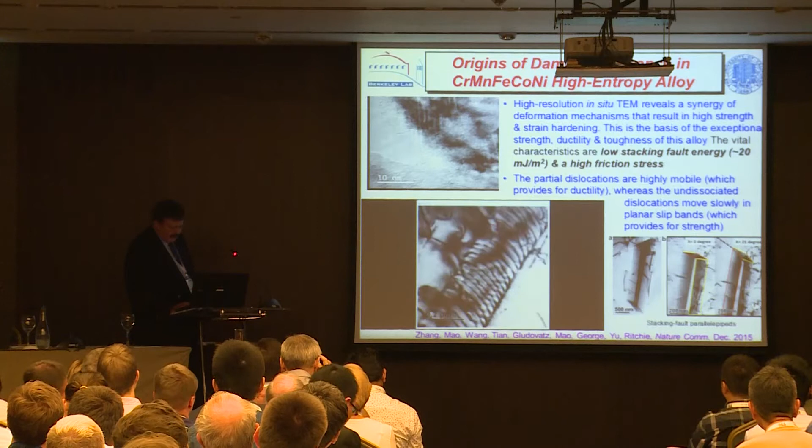You see these long planar slip bands where the undissociated dislocations move in very tenuous fashion, yet you also see this very rapid motion of the partials. I'll give you an example here—this is that same slip band, and I'll stop the movie in a minute.

These perfect dislocations are moving very slowly, but you'll see a partial dislocation move like grease lightning next to it. So you can see the slow movement while the partial comes in very rapidly. We have a duality of mechanisms: a ponderous movement of the undissociated dislocations that provide strength, and the rapid motion of the partials that give us ductility.

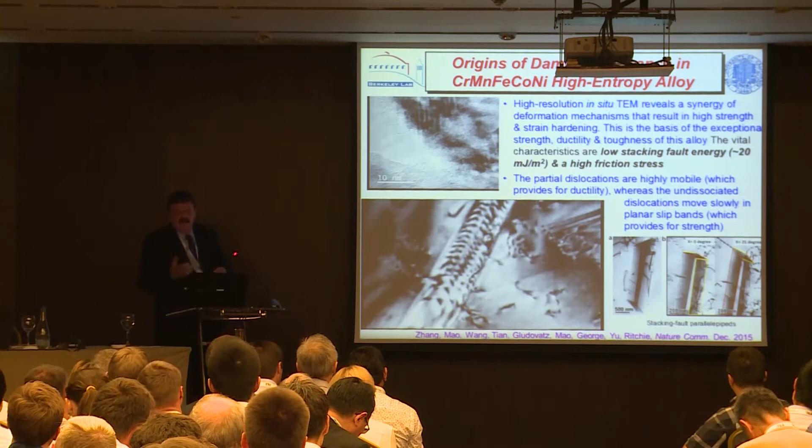There's also very strange three-dimensional defects. We call them stacking fault polyhedra, parallelepipeds, which tend to arrest dislocation motion. And we also see something very interesting: bridging in these materials. If you look at the crack tip, you see these little nanoscale bridges that form across the crack, and these are actually twinning as well. Now this could be an artifact, but it's still very interesting.

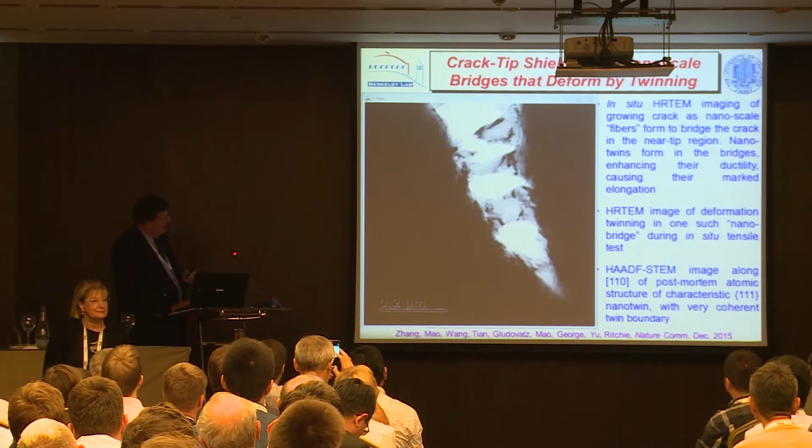Just quickly, we've also taken elements out of these materials, two of them, to get a cobalt chrome nickel material, and it's even tougher and stronger. Its strength is now up to about 1.4 gigapascals, and it has 90% tensile ductility at liquid nitrogen temperatures. This material is harder, and it twins at room temperature. You can see the twins in a simple microstructure here.

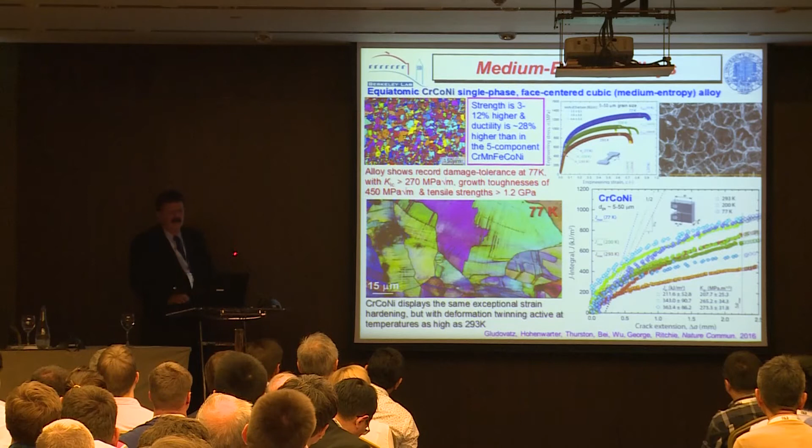When you do the toughness test, the numbers become almost absurd. The initiation toughness is well over 200 megapascals. At liquid nitrogen temperatures, it's 270 megapascals. And the crack growth toughness, valid by ASTM, is 450 megapascals. These are enormous numbers. We see it's got very low stacking fault energy, great twinnability, and again a duality of mechanisms.

There's a twin structure throughout. The twin boundaries will effectively arrest dislocation motion - you can see one coming up here. But the boundaries also act as highways by which dislocations can move fairly fast. This is basically looking at a twin boundary, and you can see these dislocations moving along it quite rapidly. Again, we have a duality of mechanisms: arrest of dislocation motion and rapid motion.

We've done these experiments at liquid nitrogen temperatures in the microscope - not quite liquid nitrogen, but this is basically at 93 Kelvin. Again, you can see the rapid motion of dislocations along the twin boundaries.

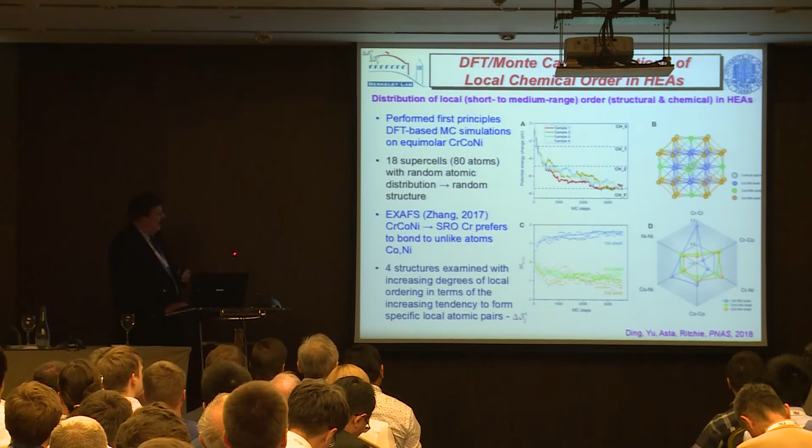Just to finish, why are these materials so unique? We do think entropy is so important, but we also think local chemical order is important too. We've done Monte Carlo DFT simulations where we've taken a random solid solution for these alloys and started to put increasing degrees of local order in. What we find is a dramatic effect on things like the stacking fault energy, which can vary by up to 70 megajoules per meter squared, along with changes in the twin boundary energies and energies for interstitial formation. So we think local order has a big effect in these alloys too. No one's seen it yet, very little evidence, but we think it's important.

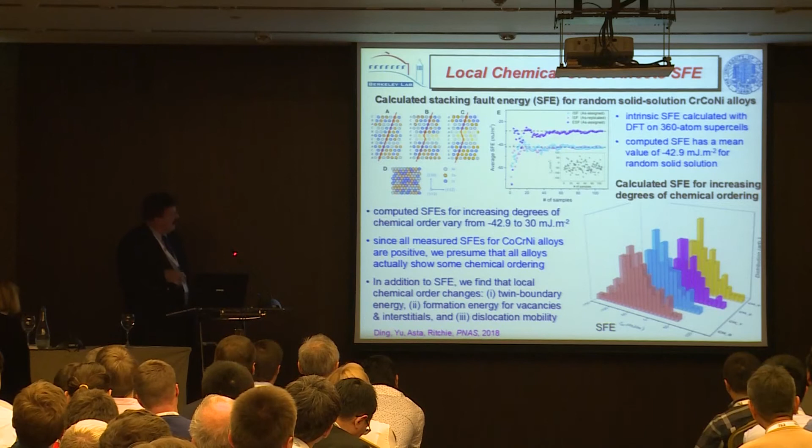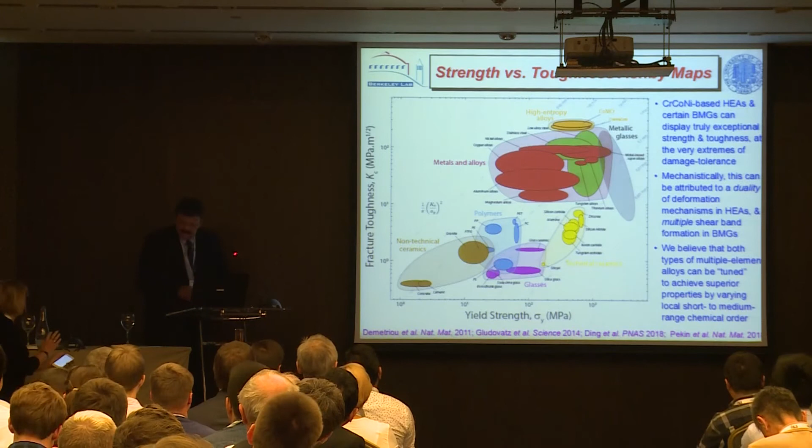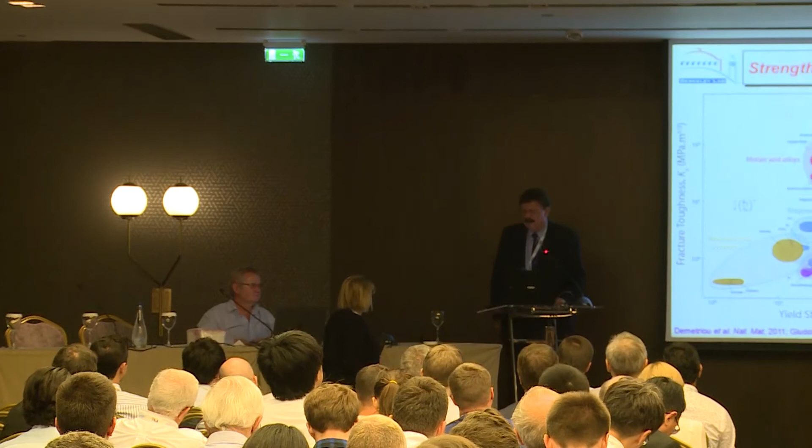This is one of the most difficult questions to answer, because in structural materials, unlike electronic materials, there's generally a couple of decades' time lag between developing them in the laboratory and putting them into reality. We're just putting ceramic composites into aero engines now, and they were developed 30 or 40 years ago. But these high entropy alloys are relatively normal materials in terms of how you process them - you can make them in volume. They're not little tiny bits of glass like the bulk metallic glasses are. So there's a very good chance they'll find a lot of applications.

These have particularly good cryogenic properties, so they might be useful for tankage and pipelines. Other people are looking at high temperature versions of these alloys, not this composition. With about 50 elements in the periodic table, there are 9 million possible combinations out there, and if you start changing to make non-equiatomic compositions, there's an infinite number of alloys. These are relatively conventional materials, so they should find applications.